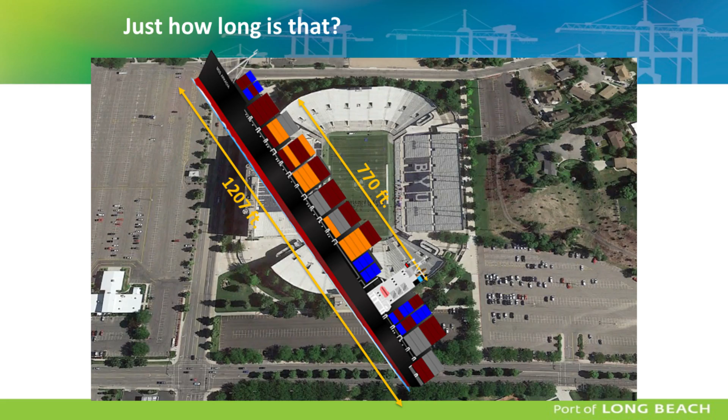So let me talk about how large these things are. One of these ships is as long as the Empire State Building would be, and as wide as a freeway. Anybody recognize the stadium? According to Google Earth, that's how far the distance is. That's how big a container ship is, if it gives you any idea. It is as wide as the I-15 freeway out here.

So if you're an engineer on the back of the boat and got to walk all the way to the front, you've got the number of steps which you need on your fitness program. These are the kind of ships we get at the port now.

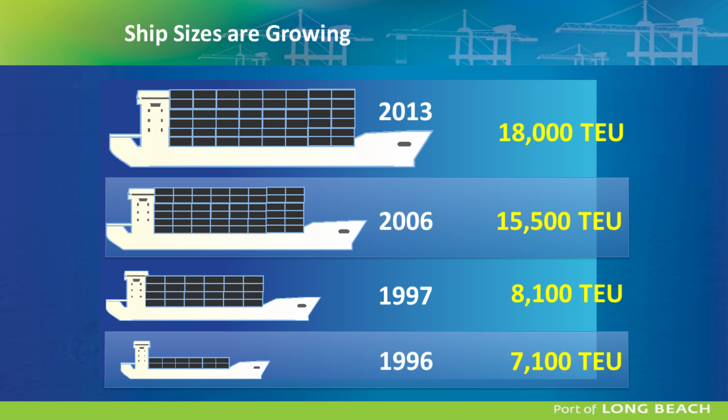And many of you may have heard that the Panama Canal is being rebuilt. Our ships are too large for the canal already, which is a huge advantage and a business advantage to us. The ships are growing, as you can see. In 10 years, they had, in fact, doubled in size. In the next few years, we will be getting 22,000 TEU ships. These things are huge.

The scope of the logistics trade will boggle your mind as to how much goods and cargo comes in. And the logistics trade is not a hugely technical business. It just requires moving containers off of ships as quickly as you can and moving them over to Walmart. That's really what's involved.

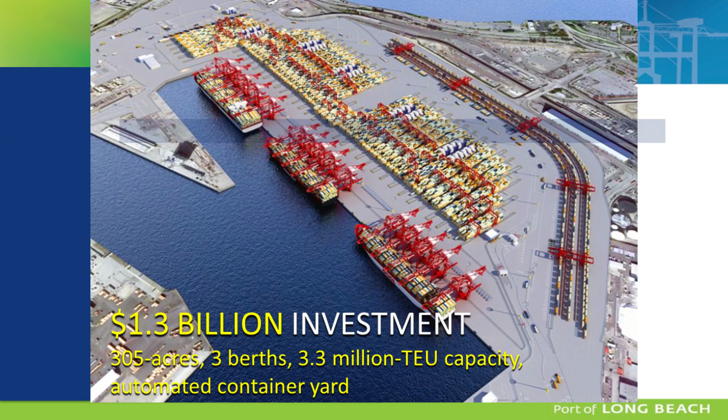So let me talk about a couple of the projects which we're working on to manage these container ships. This is a recent picture of the Middle Harbor Container Terminal. It will be the world's most environmentally friendly terminal once it's completed because of the use of advanced technology. It's a $1.3 billion investment, and it will manage 3.3 million TEU a year, making it by itself the 4th largest port in the US. So it'll be a huge increase.

But the very interesting thing is that from this location, as the containers come off of the ships, until this location, they will not be touched by a machine that is run by human hands. It'll all be computerized. Let me explain that.

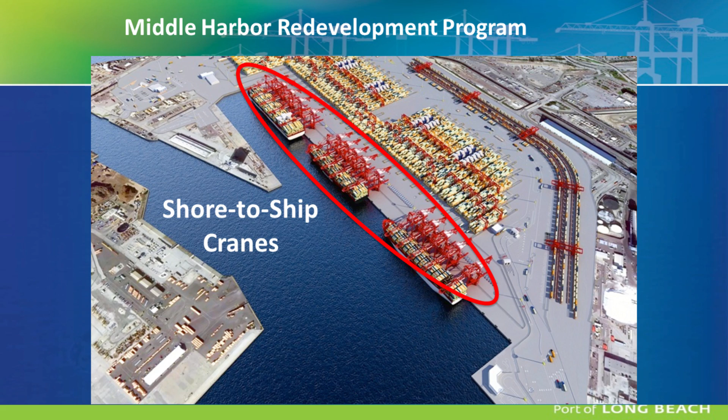These are the cranes at the quay, as we say. There will be 14 of these cranes. These are the world's largest cranes. They can reach across 26-wide container ships. The interesting thing about them is they are tandem lift, dual trolley. Let me explain that real quickly.

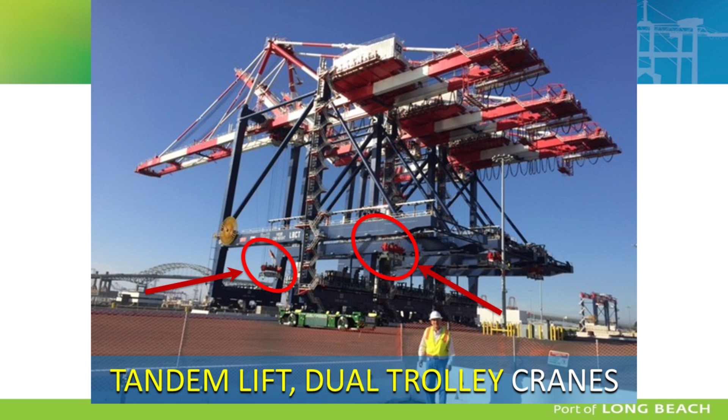This contraption here will pick up 2 containers at a time. It will lift those—this is the operator doing this—and bring those containers back here, where another operator will remove the cones off the bottom of the container, which is how they get locked in on the ships. From that point on, this crane operates by computer, and it'll lift off those boxes and drop them on the automated guided vehicles.

Those vehicles will move the containers from the ships in the stacks over to the train yard. That will be done by vehicles that have no driver, that are electrified. This will be completely controlled by an operating system. The interesting thing is I want to be there as I watch this stuff move around. There's not a human on the terminal, except the crane operators.

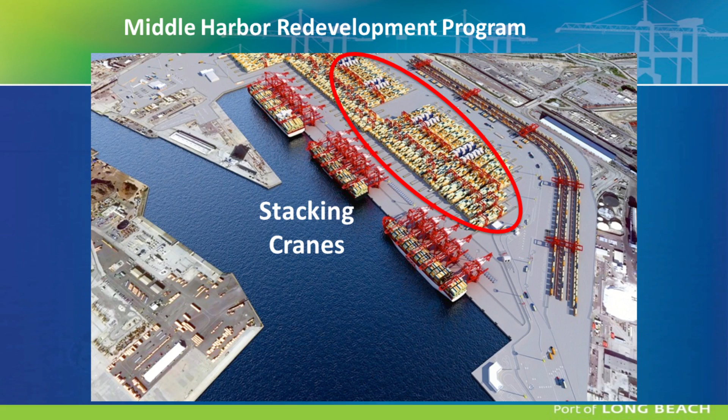At the stacks, when the containers come in, there will be stacking cranes, and those will work all day and all night to sort the containers, so that in the morning when a truck comes, it will be the first container at the top of the first stack, which means a truck will enter the terminal and be gone with the load within 1 minute. You have to be as efficient as you can because of the cost of this stuff.

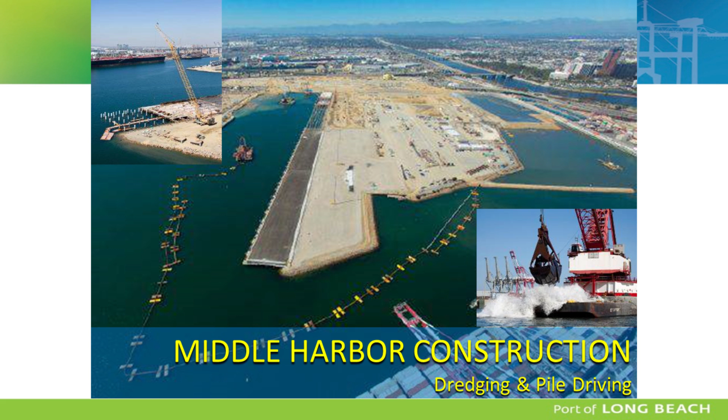This is the kind of construction we're doing out there. I wanted to point out that there's pile driving, thousands of piles, and they're building a wharf on that, and there's the landfill that we are reclaiming all of this land with clamshells as well as with a hydraulic dredging operation. We're going to move 3 million cubic yards of material to make that fill.

Talk about careers a little bit there. I understand there's a lot of women, a lot more in the field now than when I graduated. And you can see there's a lot of careers which I would encourage our women, our mothers, our sisters, and our daughters to pursue, because they are extremely rewarding.

Now, if you ever thought that you wasted a lot of time when you were a kid with video games, using the joysticks, just imagine that you could have a job right now that pays over $200,000 a year, and you work like 6 hours a day, basically operating that crane with joysticks. So mothers, be a little bit more gentle on your kids.

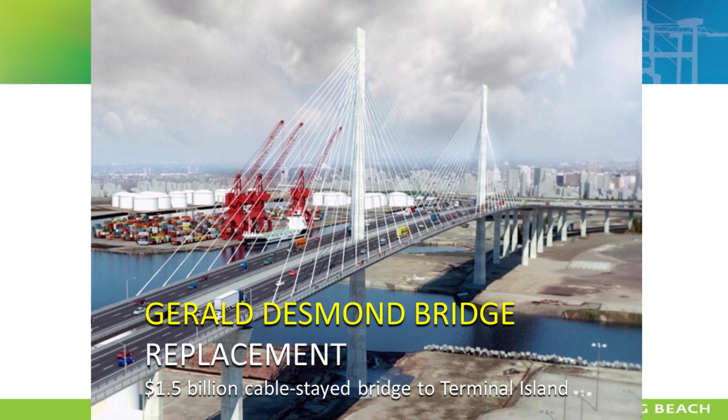The next project is the Gerald Desmond bridge replacement. This is a $1.5 billion cable-stayed bridge. It is the first vehicular cable stay in California.

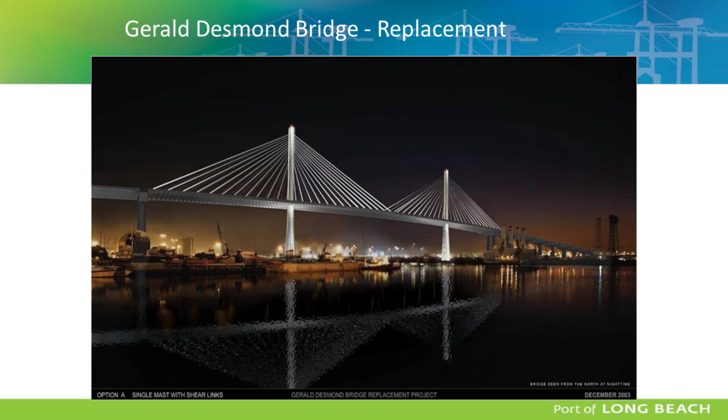Let me just talk about this a little bit. The old bridge, as you can see here, the air draft, as we call it—which is from the water to the bottom of the bridge—on the old one is about 155 feet. That is no longer high enough that we can transit the container ships. The replacement will be 205 feet, the air draft.

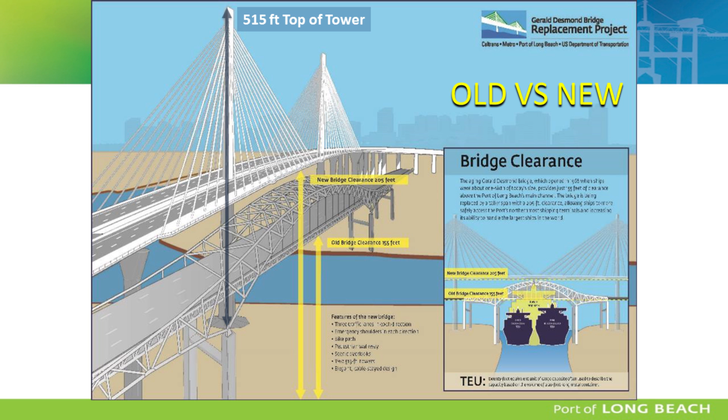I can be on this bridge, and I will be able to talk with the ship operators as they go under the bridge in a normal voice, because those ships are this big. You can see how large they are that we're expecting. The pylons will be 515 feet high—the highest structure in Long Beach.

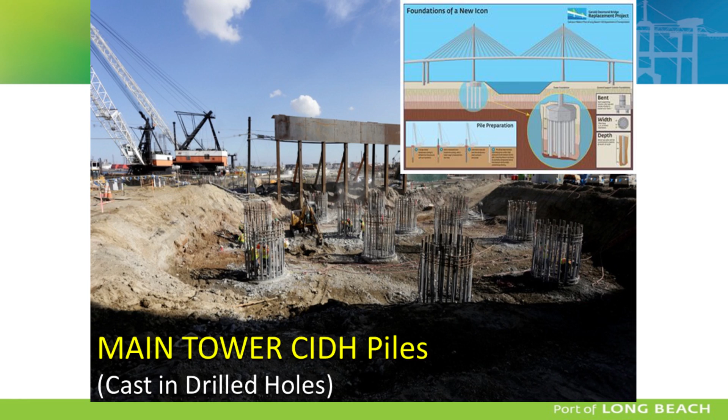For your geotechs, these are the foundations of the bridge. As you can see, of the pylons, what you see here are the 10 cast-in drill-hole piles. They are 8 feet in diameter, each one of those. On top of those will go the pile caps, right here, and this is the reinforcing on the pile cap. We just completed the first pour, which was 85 feet by 85 feet by 16 feet high. It's a lot of concrete.

These are the approach, the span, the bents, and you can get an idea as to how high those are.

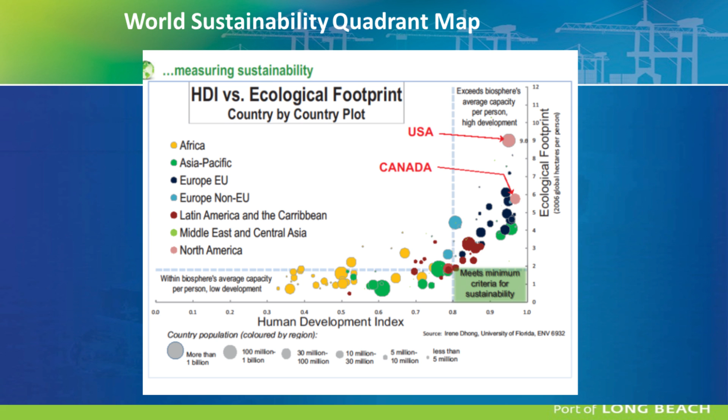You can see that a lot of the underdeveloped world, although they are not consuming as much because of their subsistence living, are also in a very poor condition. So it's all of mankind that we're talking about here, and that's our earthly home.

Let me give you a quote: 'For the earth is full, and there is enough and to spare. Yea, I prepared all things,' from Doctrine and Covenants. Now you're saying, but the Lord has promised us that the earth is all we need. Well, something's going on. Something's wrong. Let me show you what's wrong.

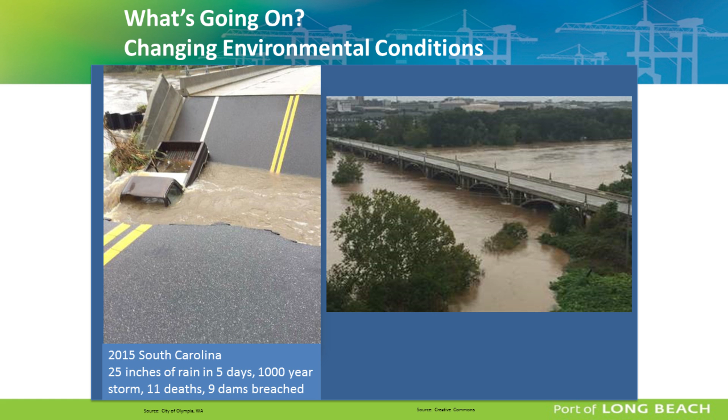Let's bring this home, closer to this week: South Carolina, Hurricane Joaquin, a 1,000-year storm—25 inches in 5 days, 11 deaths, 9 dams were breached, and bridges failed. Did we do something wrong? Did we do something incorrect? Or has something changed?

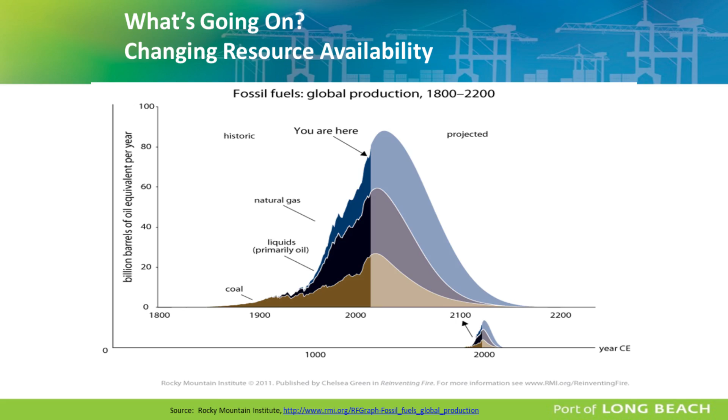Well, things have changed. Here's a graphic that ought to really scare anybody. This is a graph of the petroleum resources, the fossil fuels. The projection is that the supply will be gone by the middle of the next century. So if you're building a 50-year structure now, what are you counting on for the energy source at the time this gets built and the time it gets operated?

What's happening is that the long-held assumption was that the past was prologue to the future. In other words, if we could use the design standards, the averages, the standard deviations of the past, we ought to use that in the future and everything will be fine. I'm here to tell you it won't be fine, because the conditions are changing. The climate is changing. We have overused our resources.

The systems are degraded. And social awareness—when I was hired at the Port of Long Beach, I was told, come work for us, it's not a problem, we can build whatever we want because the community doesn't care. They don't even know we're here. We can build whatever we want.

After 2 years when I got there, development of the port was completely halted for 3 years because the community rose up and said that project you're doing will degrade our way of life. I don't care about the US and about more cargo—it's going to degrade my kids and their asthma. So communities are now becoming much more involved.

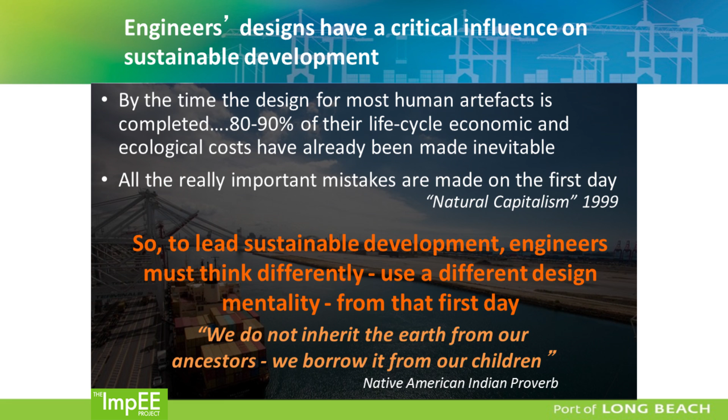So we've got to have a different attitude about how we develop and build products. We've got to think that this earth is not what we inherited from our ancestors, as the Indians of America would say, but that we borrow this off of our children, because they will not have that quality of life if we don't do this.

So the challenge is we've got to drive material efficiency. We've got to use concrete and steel and other resources more effectively. ASCE is asking that we reduce the cost of infrastructure by 50% in 10 years. That means better design, less use of resources. The energy efficiency—we are only 10% as efficient as we could possibly be.

So we've got to make a difference here.

Talking about society, it was where the engineer was the hero and could do whatever he wanted, and the public would trust you. In the next few years it became, I trust you, but something went wrong, let me know what you're doing. Then it was, show me what you're doing, because I'm not really sure I trust you anymore. And finally, it's involved me—I'm a part of this process.

That means the engineer must learn how to deal with the community and society and the politicians and the regulators and everybody else who would be involved in a project. We have the technical complexity down—that's not a problem for us. You guys are all learning that right now.

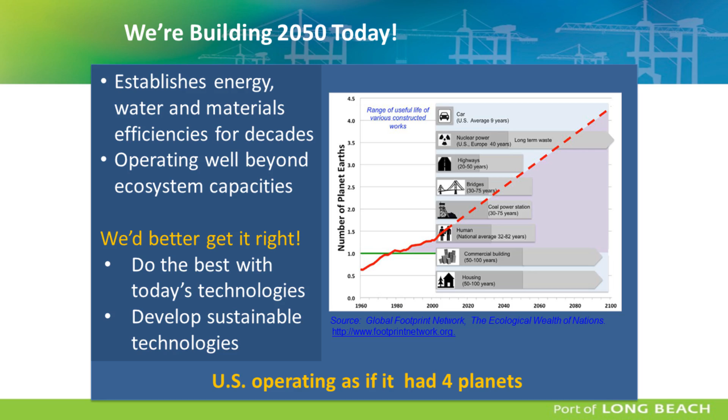Remember, we're building 2050 today. What you build in housing can last 50 to 100 years. I live in a house that's over 50 years old right now. So what you build now will be here in 50 years. It'll be your kids' homes that you're building right now. We've got to do it better. We've got to be more respectful of the cultures which we're in, and we've got to do it efficiently.

It requires new design approaches. What's happening is that we don't know what the conditions will be in the future. We don't know how much rainfall we'll have. It's not what it was in the past. A sea level rise would be an impact, and we've got to design with that uncertainty in mind, which is hard for us as

the engineers, because we want precision. You've got to develop new relationships, not just with the owner who you're building a product for, but with the community which will be impacted by that project. It requires a kind of engineer.

And this is what we're asking you to do. In your normal planning and development of projects, we normally look at only the end of construction. And if the maintenance guys are lucky, we might consider them in the project. On the environment, we say, do no harm. Do no harm. Just don't hurt the environment anymore. And it's the owner who we deal with.

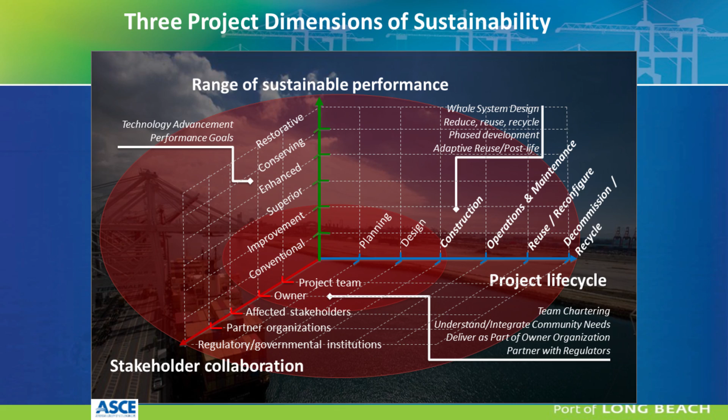I'll give you an example. Larry H. Miller, when I was in school here—you guys all know Larry H. Miller, the car dealer—they had a great idea. They said, look, we've got these car lots all over the place. It rains. We can capture that water. We can wash our cars with it. Why do we use the fresh, treated water to wash our cars? It was a great idea, and they built it.

And the state came in and said, you can't do that. That's our water. We own that water. You cannot decide how to use that water. You had to change the laws to make water recycling possible.

So the vision of the engineer is that you're a leader, you're a planner, you're an innovator, you take risk and you manage risk, and you are a leader in the public discussions in coming up with your projects. The Code of Ethics of ASCE says you will hold paramount the safety, the health and the welfare of the public, and use sustainable development techniques.

This is a quote from Mr. Ray Anderson, who I met many years ago. He was a visionary man who was the CEO for a carpet company, and he was the first one to be concerned about corporate social responsibility. And this is what he said: we are all a part of the continuum of humanity and life. We will have lived our brief span and either helped or hurt that continuum, and the earth that sustains all life. It's that simple. Which will it be?

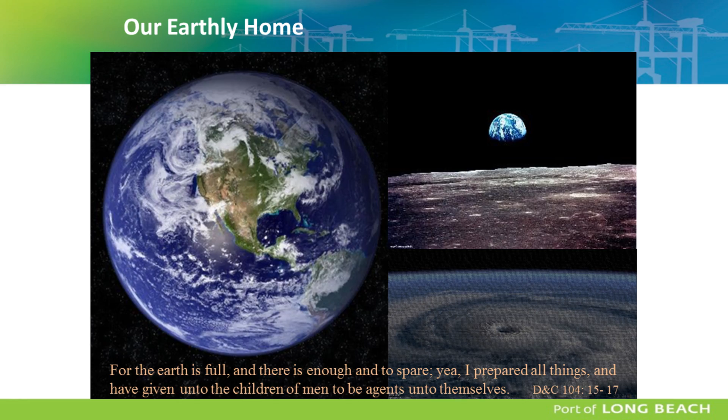So if you're going to invent the future, the best way to predict it is if we invent it ourselves. That's you guys now. And so remember this quote where we said, the earth is full and there is enough to spare, and yea, I prepared all things. Well, the Lord also said, for I have given unto the children of men to be agents unto themselves. In other words, the world that he gave you is in your hands.

You can choose to follow the commandments. You can violate those. You can violate the physical laws. You can do whatever you want. But what I'm telling you is that the earth is not enough unless we care for it. And with that, thank you very, very much for listening.